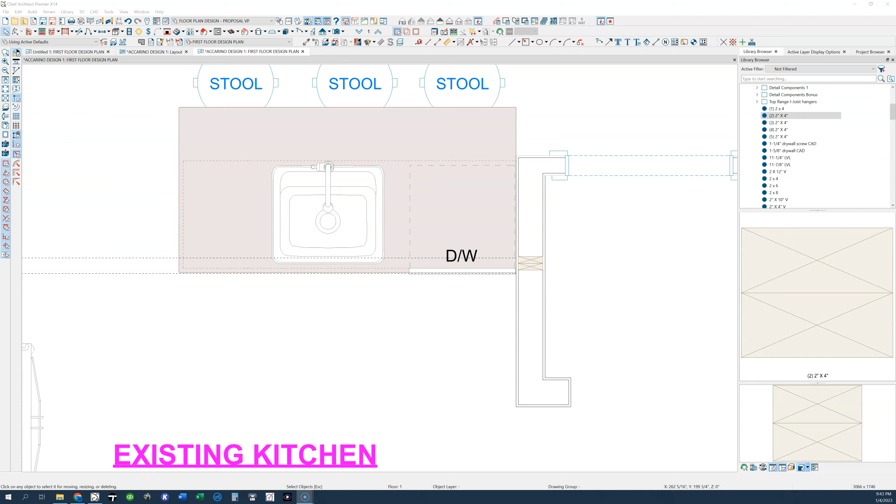This stud here should be two studs, should be two support studs, but I'm only seeing this one in the picture, and it looks like there was an old stud there, but there's definitely a ceiling beam flush in the ceiling from here to here.

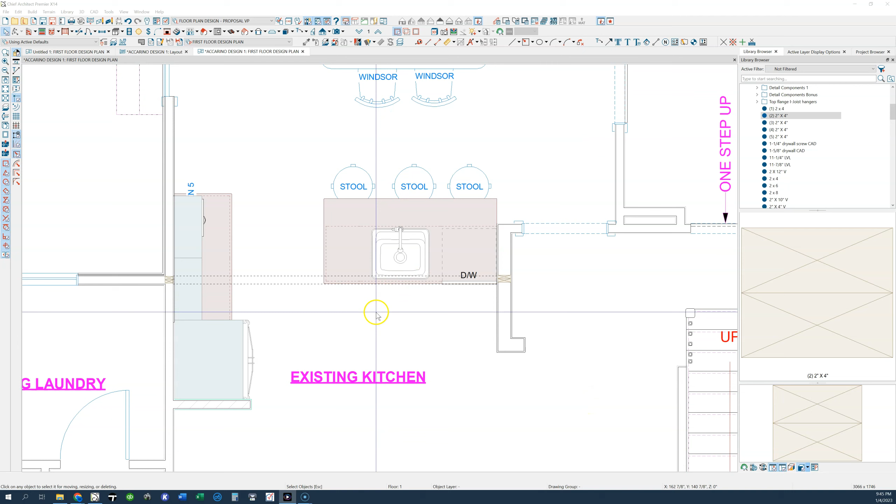That beam should be hidden in the ceiling right here, posted down in this wall, because this is supporting the second floor upstairs. If I do a quick overlay upstairs, this is the extent of the second floor upstairs, so this has got to have a beam flush in the ceiling supporting here. So we technically cannot get rid of this entire wall.

We could attempt to get a beam from here clear across to this side, but I'm fairly confident there is some plumbing somewhere for this drain and this sink and this toilet running this way front to back, right above in this area over here.

So I don't want to say definitely take this wall down, put a beam straight across, put it on the construction drawings, and then they demo the ceiling and they see a toilet drain line here. I mean, it's possible it's going into this wall here, but I can't say without removing all the sheetrock.

But there's definitely a sink and bathtub drain right around here somewhere, and where it's draining to, I honestly can't say without there being more demolition work done. It could be drilled and notched through the floor joists and going to here, or it could be going to here. But also there's the possibility that this beam going across is going to block the passage of those drain lines.

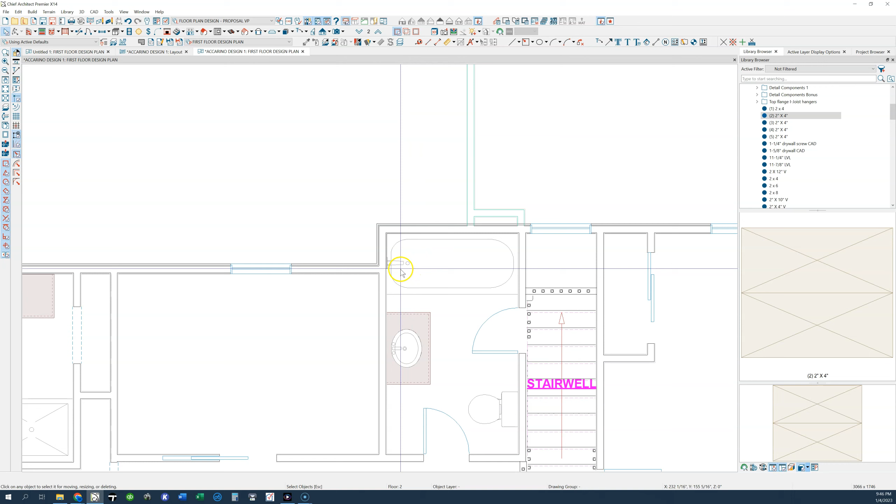Also, to get something from here to support this second floor and these cantilever joists, these floor joists, for one thing, I don't believe this beam will be able to be flush going straight across, because it's got to support the cantilevered floor joists extending past it. Here it could be flush framed, but here it couldn't.

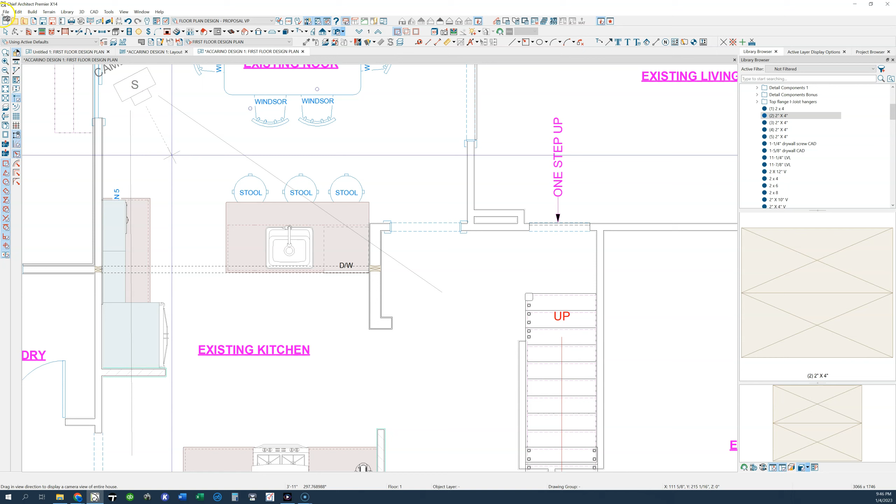So in this view here, this should be up. So this beam that's up in here, it can be flush to support these floor joists, and it'll be tee'd flush into the face of that.

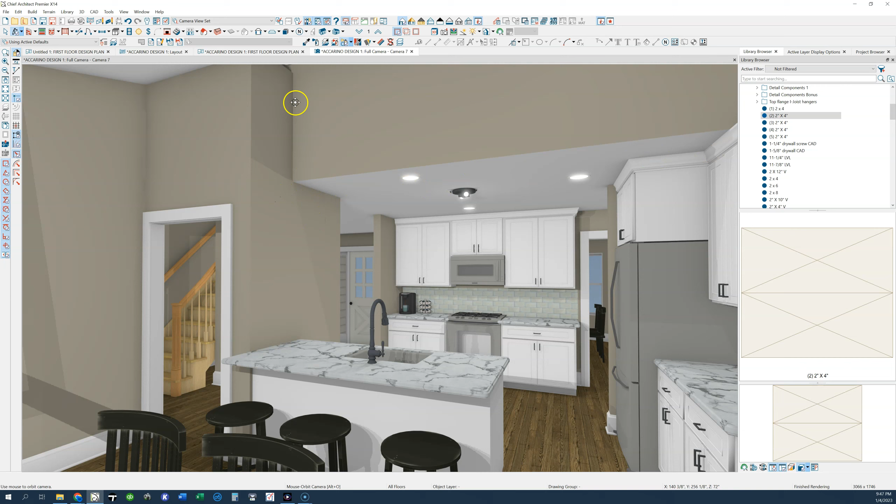But if it's got to continue onward into this stairwell wall, it's going to have to drop down to support the weight of these floor joists cantilevering past it, which then means you're going to have a low soffit going across this ceiling. So just take that into consideration. But let me know which way you want to go about this.

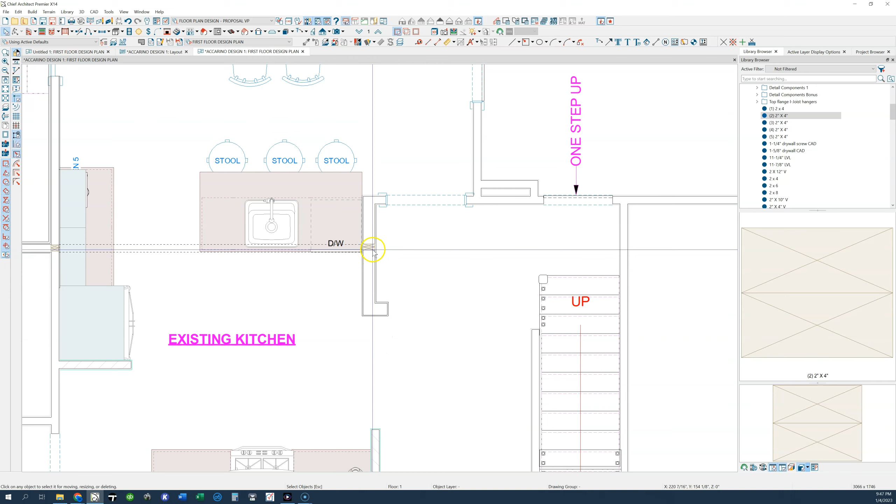I mean, we could take the majority of this wall out and do a column right here as an end cap to whatever base cabinets we put here, or you could just take out the wall from here forward and leave this wall from here back. I'm working on another project in Rockville Centre right now,

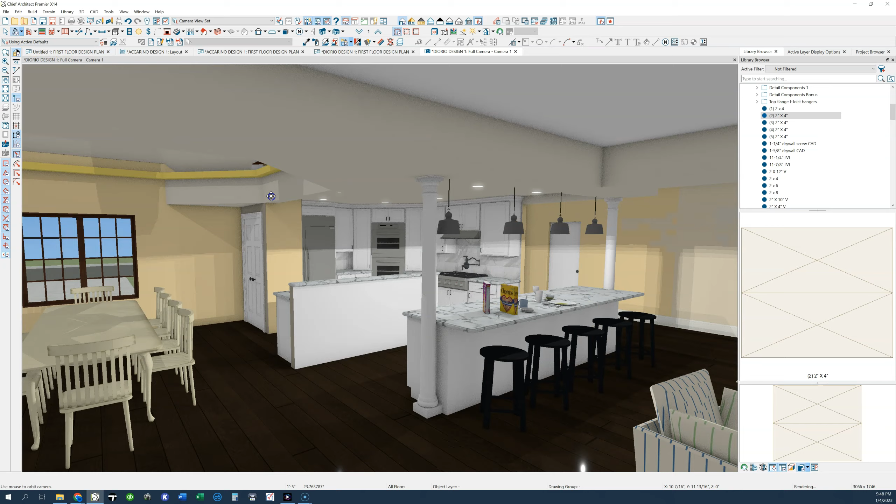where I'm doing something similar. We have a column and an end cap situation for this house, because he has lots of structure going on in this house, and I'm trying to maintain as much structure as I can, but open up the floor plan a little bit more.

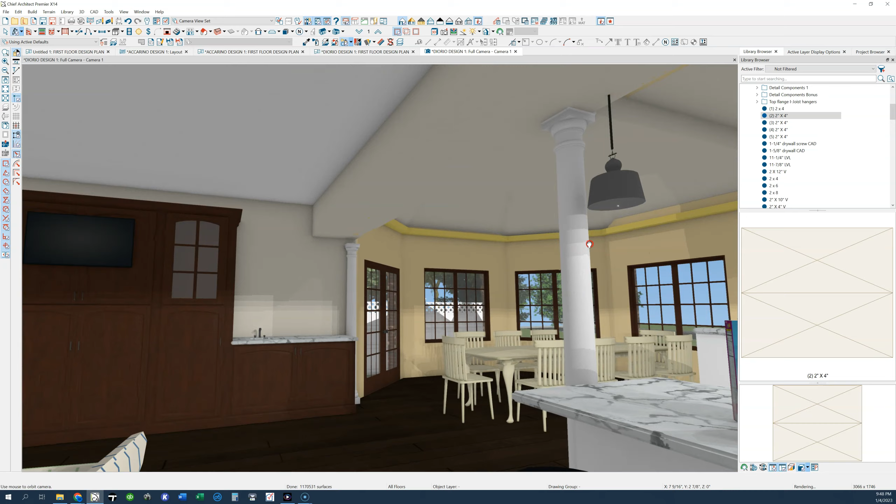He's got this big roof cupola over here with beams going at each end of the cupola, and he's actually got a column right here, so we're doing a new beam straight across. He's got a column over here, so we're doing a new beam going across. So basically, to keep it simple, I'm proposing putting columns at the end of each part of the island.

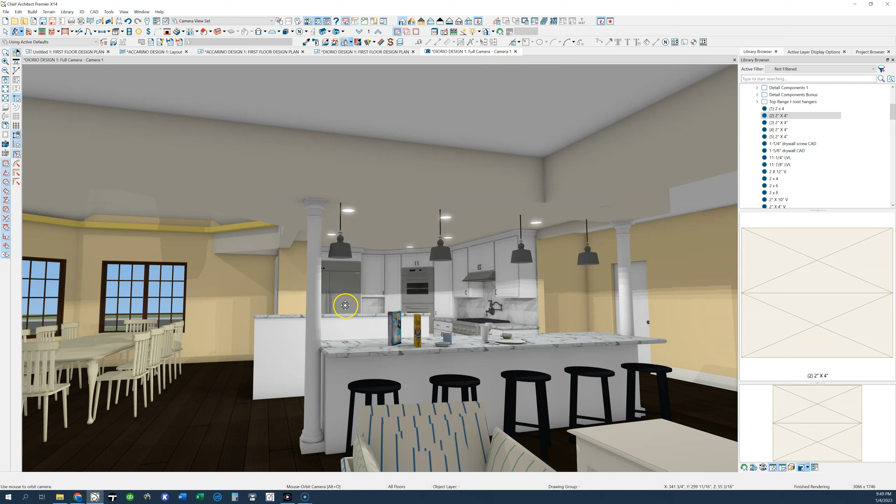You can have the island extended and do the column on top of a pedestal on the side of the cabinetry. It just requires them to do a little bit more custom work on the cabinetry to take into account that the structure is sitting on their cabinets.

But just want to pass that by you and let me know what you think, or if you're still contemplating the direction you want to go on the project, just let me know.